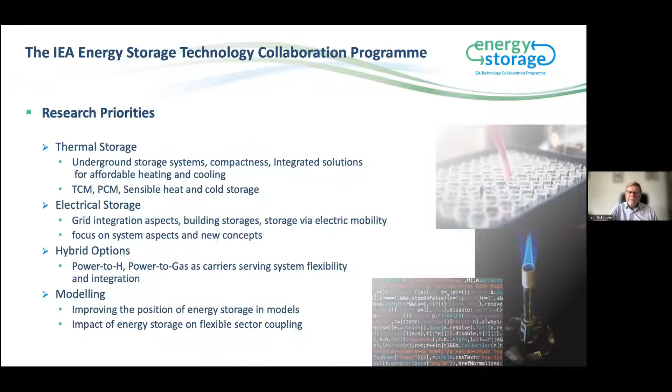The research priorities we have are thermal storage, both for heat and cold. We deal with underground storage systems, but also TCMs and PCMs, and sensible heat and cold storages. Electrical storages, in particular in relation to the grid and the connection and the system aspects, also in buildings. Hybrid options like power to heat or power to gas, and those kinds of intermediate options will be regarded, and we'll deal with modeling. Those are the major priorities we have in our work.

So we do this work in tasks, and all these tasks we have basically divided in 3 categories: energy storage in energy systems, materials and components, and technology development and technology improvements. I will discuss these various tasks in the second part of the presentation. But first, some general highlights in 2021.

I think everybody is aware that the sense of urgency to deploy energy storage is increasing tremendously. In the past year, we have seen very important and also alarming reports by the IPCC, but also by the IEA itself, which forecasts and predicts that we have at least a doubling of flexibility options required by 2040. So that is basically increasing the need for energy storage as part of the transformation process.

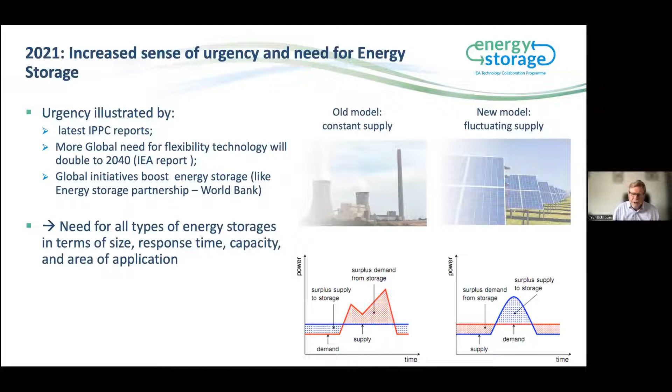We also recognize that there are many international organizations and initiatives who also are boosting the request and the implementation of energy storage, like the World Bank, Mission Innovation, and others. And all types of storages are therefore needed in terms of size, response time, capacity, and application area. So there's a wide range of storages which are needed. This is basically where we have to look at.

The policy recommendations we have given in the past year are basically 2 levels. The economic ones is that we have tried to emphasize that the economic value of energy storages are different for all kinds of applications and technologies. I give an example: 1 kilowatt hour of battery capacity of a cell phone would cost approximately 10,000 euro if you calculate it back to 1 kilowatt hour. If you do the same kilowatt hour in a thermal variation for residential hot water, it will be €1 or $1. So it gives a wide variation of technologies and application areas, and therefore also a wide variation of cost and economic value.

And this is an important factor because in the past, the value of storage has not been really taken into account with the system transformation going to renewable energy circumstances. So the value depends on how we can utilize energy storages in a total system concept, whether it be industry or self-consumption in domestic applications, or in a wider range of the total energy grid. In all these aspects, energy storage will have a certain value, and it is good that we understand the values of that.

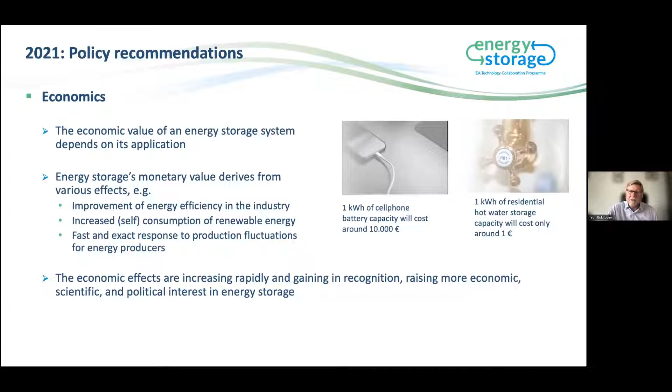So by gaining more recognition and awareness about the economic value, we see that there is far more interest from science, from politics, and also economically on how we can use energy storage in our systems. With regard to policies, we have made very strong recommendations to policymakers that this economic value of storages needs to also be implemented in government regulations.

We are very much aware that the electricity grids are really stressed at this point in time through the growth of solar and wind energy, but at the same time also the changing patterns of electricity consumption for electric vehicles, for heating and cooling by electricity and heat pumps. That causes a lot of time differences between time of production and time of use, and that basically requires a new set of government regulations to allow energy storages to be integrated in the system, particularly in the infrastructure.

The second message is that, of course, as we have an urgency to deploy more storages, there's also an urgency to provide enough funding for the research, demonstration, and deployment stages. That is a message we have to keep conveying to many of the governments. Successful international collaboration is also a key success factor if we want to increase the research activities within the TCP.

On the communication side, just for your reference, we had a very successful conference, the ENERSTOCK conference in Slovenia last year. We're participating in quite a number of workshops and conferences worldwide. Approximately 25 task meetings were held in 2021 with the participation of more than 150 institutes and more than 250 experts globally. So that's a very strong and wide community of experts in the ecosystem of our energy storage TCP. And last but not least, we have started 4 new task proposals and we'll highlight them in a minute.

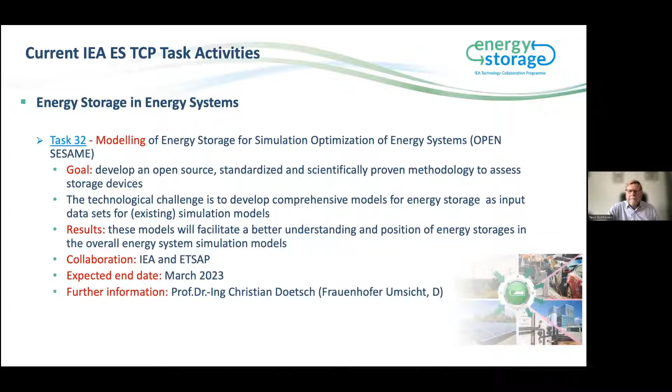Another very important task, which hopefully will be concluded at the end of this year, is the task on flexible sector coupling. It's a complicated issue, but we're very much aware that many people around the world are looking at how this sector coupling can be realized. And sector coupling in this sense means that we are basically looking at the production of renewable electricity and how that will serve new areas like thermal applications in buildings and industry, hot and cold, but also the change in the fuels for vehicles, for mobility, to electrification.

All these new forms of demand profiles based on electricity require that there is some sort of intermediate gremium like storage to facilitate the use of all these electrons and energy. So flexible sector coupling is looking specifically at how energy storage can facilitate an easier transfer, an easier coupling of sectors like thermal applications, mobility, and electricity production. It has a very important impact on a lot of the system design aspects we see around the world.

And it is an interesting topic. We'll probably have an end result by the end of this year. Further information can be received from Dr. Andreas Hauer from the Bavarian Center of Applied Energy Research, ZAE, in Germany.

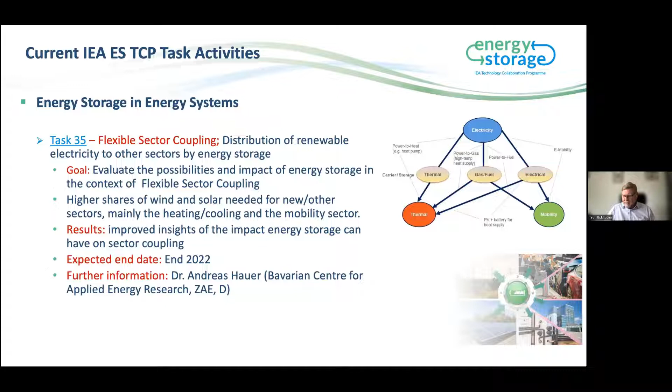Another task in this energy storage and energy systems context is smart design and control of energy storage systems, with basically a link to artificial intelligence, for net zero energy buildings. The goal of this task is to investigate smart design and control strategies, in particular with energy storage, trying to optimize the balance between supply, domestically produced renewable energy, and the demand side in buildings. It will be providing information on guidelines for operations and some more general aspects of artificial intelligence in controlling these strategies, controlling these new systems.

Oops. And I'm sorry.

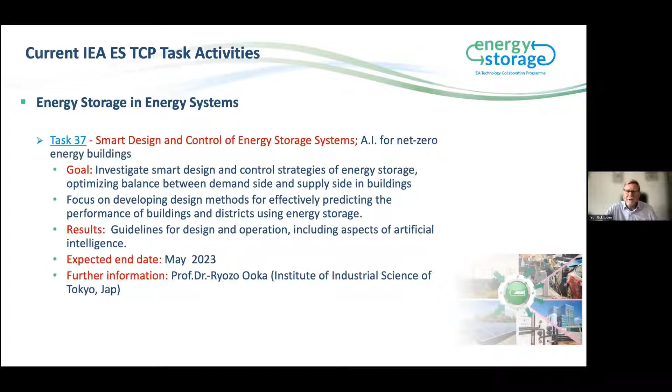And that will be completed by May 2023. This task is led by Professor Dr. Ryozo Ooka from the Institute of Industrial Science in Tokyo, Japan. And it is a very interesting, more scientifically oriented task where we have more insight on how artificial intelligence can be contributing to control strategies and storage.

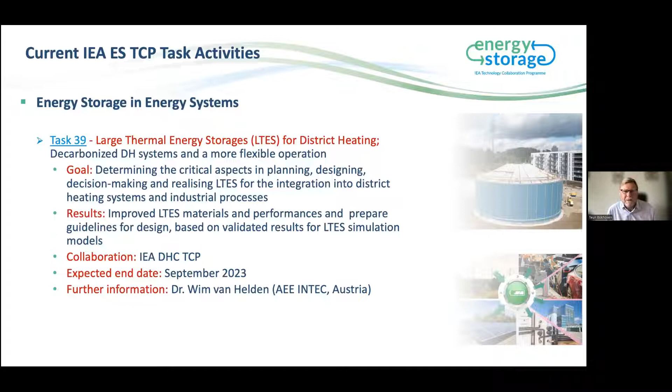Task 39. This is a task which will be highlighted by the next speaker, Wim van Helden, so I won't give a lot of time for this because he will tell you about this task in detail. It deals with large thermal energy storages, basically for district heating. Very important in the transformation. And particularly in Europe, we now see a huge pressure to get alternatives for natural gas. And these kinds of systems with district heating and large-scale thermal storages are extremely important to find solutions for the short term already. But Wim van Helden, who is the operating agent for this task, will tell you in a few minutes.

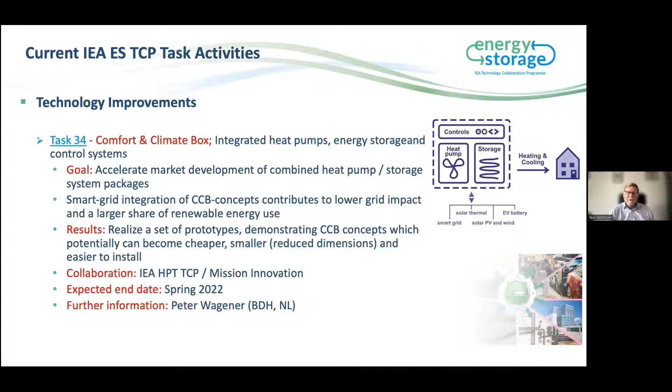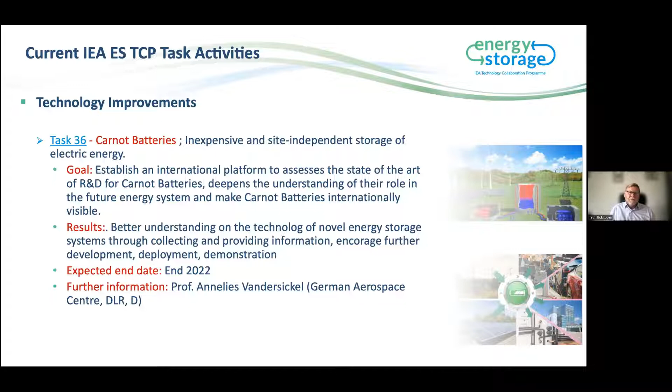The results provide a better understanding of the technology, and it will be disseminated. We have seen that a lot of interest now already is leading to follow-up activities on this task. It's very interesting, and I surely can recommend that you follow the developments. The expected end date of this task is the end of 2022. For further information, you can connect to Professor Annelies Vandersickel from the German Aerospace Center, DLR, in Germany.

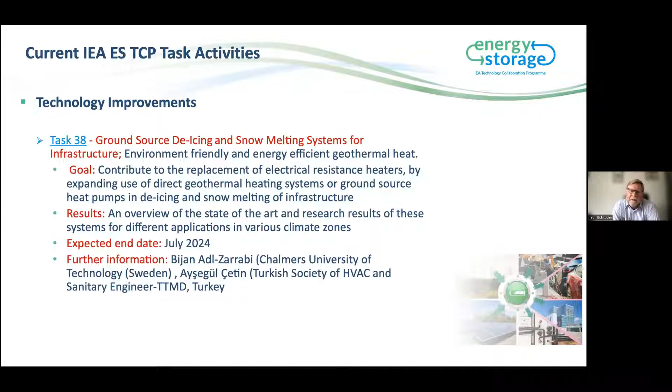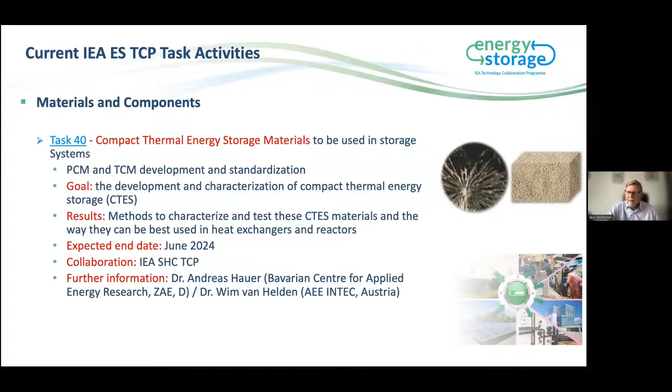Then there is a new idea for the standardized use of building mass as storage, in particular to create more grid flexibility. It's a theme which comes up with the stress in the electricity grids, and storage through the building mass can help relieve the stress in the infrastructure. That is work in progress now to develop a task for that area.

The third one will deal with energy islands, including energy storage. It will assess the role of energy storage if we consider a hub function of large-scale renewable energy production, for instance through wind and solar, and the various demand profiles we can achieve. These hub functions with energy storage can, again, have a great impact on the electricity infrastructure.

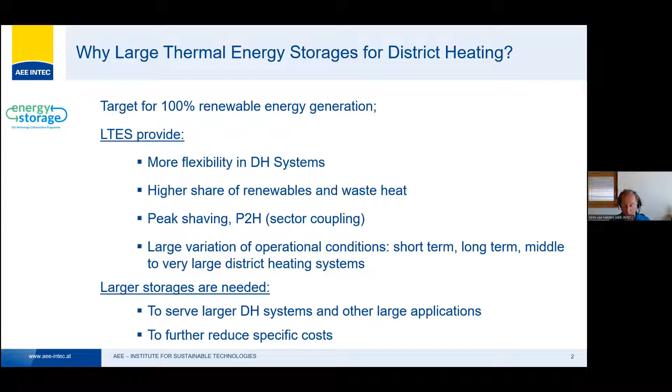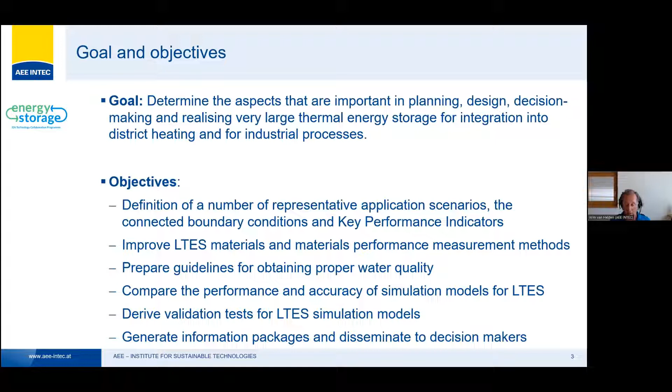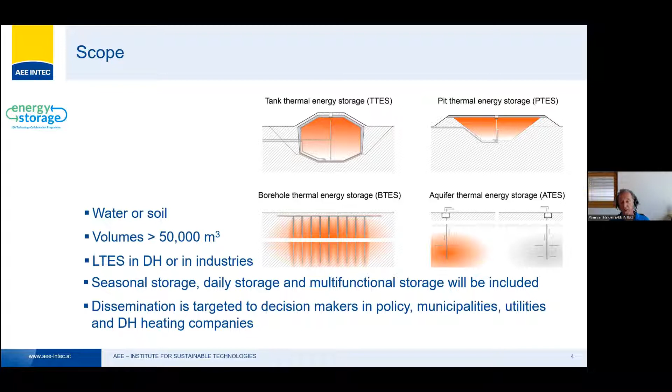And we look at volumes typically larger than 50,000 cubic meters for district heating or industry. And we look at seasonal storage, but also at daily storage or multifunctional storage. And the dissemination is targeted to decision makers, either in policy or in municipalities or utilities or district heating companies. So those people that are in charge of those systems that would profit from large thermal energy storage.

We subdivided the work into 4 subtasks. You will see the subtasks more in detail later. One on application, Subtask B on the components and its materials database, Subtask C, which is the biggest subtask, on the round-robin simulation, and then Subtask D on the knowledge base for decision makers. There are several input-output connections between the different tasks. And the idea is that all the work in the first 3 tasks leads to information that is being gathered by the 4th task and being prepared for dissemination to the decision makers.

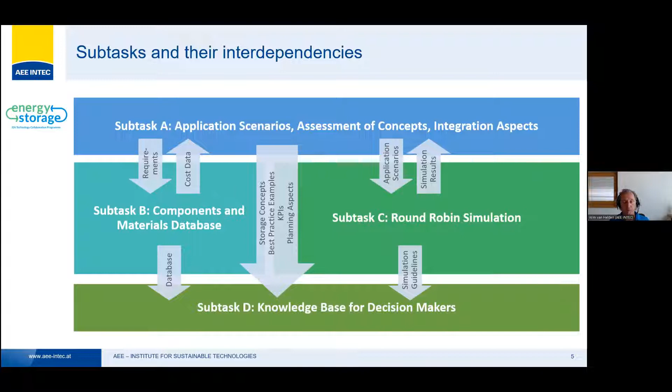And I see that this doesn't sum up to 33, so I made a miscalculation in it, but you can find out yourself where the two others are.

Let's go through the subtasks. The first one is on the application scenarios, the assessment of the concepts and integration aspects. It's led by Pierre Delmas from NewHeat, a company that is working on integrating and designing thermal energy storage to implement them, integrate them into district heating systems.

The goal of this task is to define a number of representative application scenarios, to also define the connected boundary conditions in order to give people an idea of what the critical aspects are of the design of these systems, and key performance indicators, giving a basis for comparison between the different technological solutions.

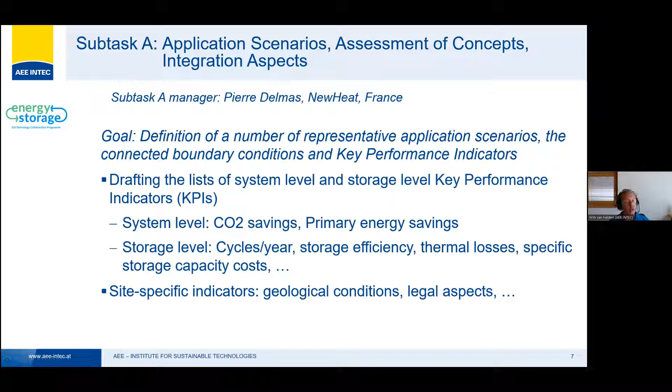So what we did is we drafted a list of system level and storage level key performance indicators. On a system level, this is, for instance, the CO2 savings provided by coupling the storage into the system, and primary energy savings. And on storage level itself, the number of cycles per year that can typically be provided by the storage, its efficiency, the thermal losses, and the specific storage capacity costs. And on the site-specific indicator level, it's the geological conditions and legal aspects, mainly connected to the groundwater legislation.

Here's an example of part of the drafted key performance indicator table. First, a group of district heating network related key performance indicators, like the increase of the renewable share or the reduction of fossil fuel dependency on the district heating network. Then there are some storage related KPIs, as examples here, the storage capacity in megawatt hours, but also the storage capacity related to the site, so specifically in megawatt hours per cubic meter.

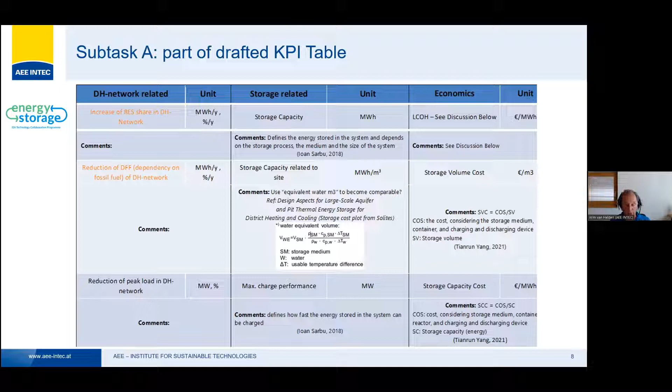And the third group is the economics. So the levelized cost of heat. And for instance, the storage volume cost, so the euros per cubic meter, or the storage capacity cost in euro per megawatt hour capacity. This is only one part of the KPI table. It's being refined with the present work. And at the end, we will have a KPI table that experts can use to make a fair comparison between the storage technologies on different levels.

On Subtask B, materials and components, we work on improving LTES materials and materials performance measurement methods, and to prepare guidelines for obtaining the proper water quality. It's led by Bijan Adl-Zarrabi from the Chalmers University in Sweden.

And what we worked on now is that material characteristics and performance data are gathered and will be included in the already present database, which is the SuperGen storage database from the University of Birmingham, which is now mainly dedicated to electricity storage, but will now be completed with materials data from thermal energy storage for large thermal energy storage systems.

Other work that is being done is to specify the desired functionality of materials needed for large thermal energy storage. And one example here is to decide what the functionality is of different layers of a floating cover for a pit thermal energy storage. This is done by Aalborg CSP, a company from Denmark, designing and realizing these large thermal energy pit storages. You see here, for instance, that on the bottom layer, there is a barrier that has as function to make sure that there's no hot water and no moisture diffusion into the top layers of insulation.

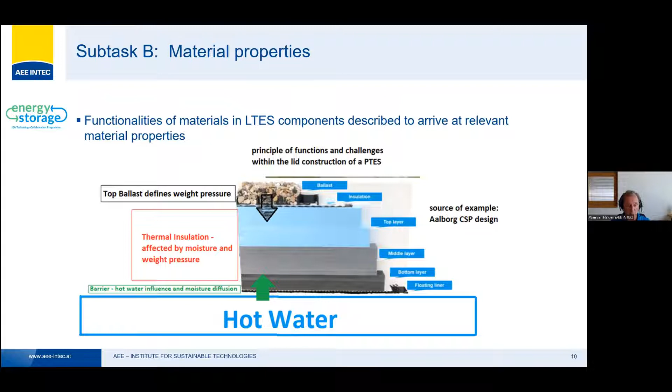In Task B, we also work on corrosion-related water quality requirements. And also for tank and for pit thermal energy storages, there are some metal components in the storage that will corrode under influence of one factor, the oxygen contained in the water, and the other factor, the chloride content in the water. The upper table is for large amounts of oxygen, so more than 0.02 milligram per liter, and the bottom one is for lower contents of oxygen.

And the red areas are those areas that we should move away from. Only the green and yellow areas are suited for applying metal components into such a storage. And you see that for large oxygen content, it's very critical that there is a typical pH value, and also the chloride content should be low, while for low oxygen content, there is a less critical area with a larger variation of possible pH, so the acidity of the system,

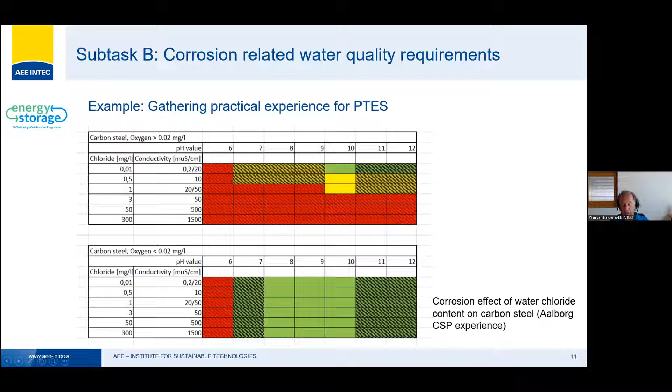and also a larger possible variation of the chloride content. So in practice, the water being used in these kinds of systems has to be prepared in order to have either a low oxygen content or, with a higher oxygen content, a certain pH amount. And this helps designers of these kinds of systems to make sure that the lifetime is also the expected lifetime.

Going to subtask C, the round robin simulation. Thomas Schmidt from Solites, Germany, is leading this largest subtask. Its goals are to compare the performance and accuracy of the simulation models for these kinds of storages, and also to derive validation tests for the simulation models. So the different models will be targeted at different TES sizes. The inlet and outlet temperatures will also be defined.

We have also defined which kind of round robins will be taken. A round robin is, say, a concerted action in which different experts work with different simulation models to solve a similar problem. So there will be some reference cases, and there will be some targeted numerical simulations of storages. This will be done by different experts on different numerical modeling software. And then they will be compared to see what can be improved, either in the software or in the procedures defining the boundary conditions for the different cases.

So there are two stages. The first stage is simple operation of the storage: 3 months charging, then 3 months rest, and then 3 months discharging, with multiple storage cycles. After these simple operation results, a comparison will be made. And after the comparison and possible adaptations, a seasonal storage operation will be performed, also with multiple storage cycles.

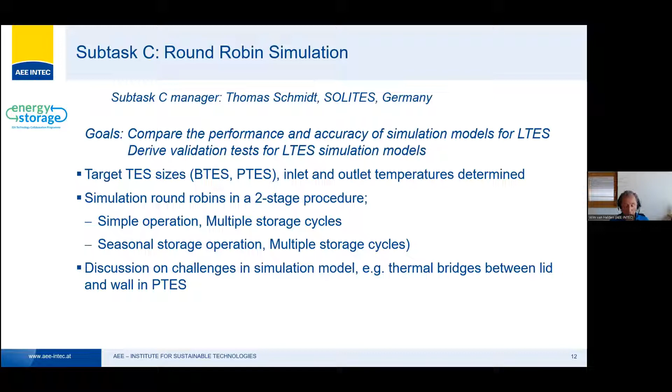There's also discussion ongoing on the challenges in the simulation model. For instance, how to work with thermal bridges between the lid of the thermal storage and the wall of the pit thermal energy storage. An example of this problem solving is here. Normally the cover insulation has a certain thickness, and there's heat leaking from the side of the water through the soil to the top, to the ambient. Normally, the cover insulation is numerically solved as only a very thin layer that has a certain resistance, and therefore the thermal bridge will not be properly calculated.

In practice, there are two possible solutions. One is to have the same cover thermal resistance, but with a small overlap. Then there is a similar thermal loss, but the wrong ground temperature at the surface, at this top red point. The other approach is to have the cover insulation as a soil layer with an adapted thermal resistance, so it looks like a soil layer on top of the storage. Then there will be correct top thermal losses and correct ground temperatures, but it's more numerical work. This is one of the discussions ongoing between the experts, how to solve this problem in practice in the comparison of the different numerical models.

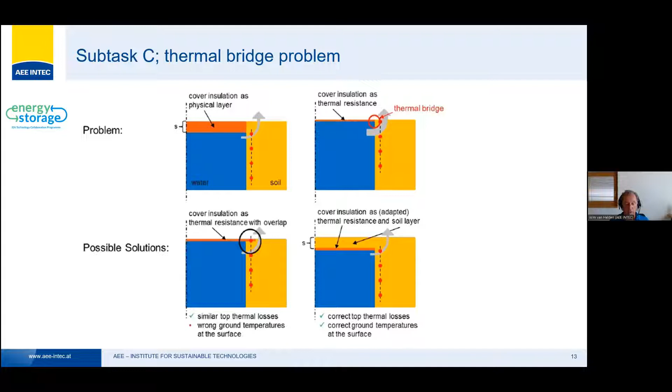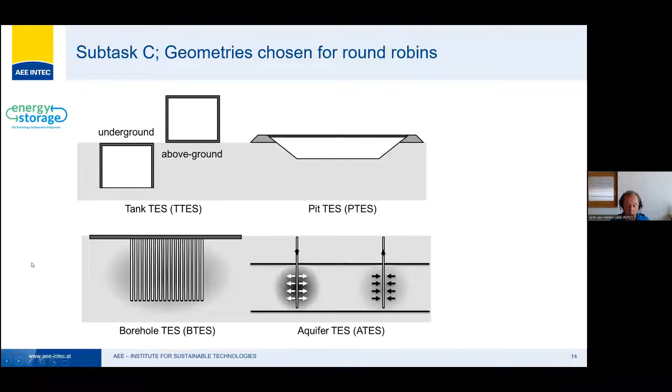Also, a choice has been made for the different geometries that will be used for the round robins. There are 2 tank thermal energy storage configurations, one underground and one above ground. There will be one configuration for a pit thermal energy storage, one for a borehole thermal energy storage, and one for an aquifer thermal energy storage. So in effect, there will be 5 geometries calculated by the experts on the different numerical simulation software.

Then Subtask D, the knowledge base for decision makers. It's led by Geoffroy Gauthier from PlanEnergi in Denmark. The goal here is generally to generate information packages and to disseminate this to decision makers. What we already did is we designed and sent around an online questionnaire for decision makers. There were 54 reactions up to now, and we made the first analysis.

To our surprise, the reactions showed that 24 large thermal energy storages, mainly in Europe, are already in planning or in realization, which is a larger number than we had in our knowledge. The other result is that system perspective, key performance indicators, technical aspects and financial aspects are seen as most interesting for the decision makers.

To our surprise, project feasibility and planning was not seen as interesting, while in practice the experts have shown that, when realizing a project, this is very important, meaning that we need to focus with this dissemination also on the aspects of project feasibility and planning. So those are a few of the outcomes from the questionnaire.